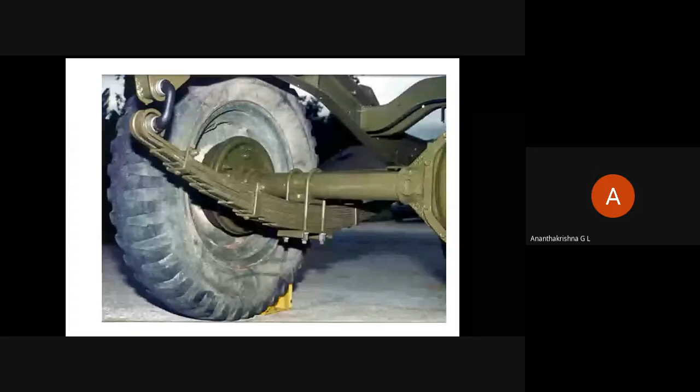Okay, so we were solving problems on leaf springs. I think we'll solve one more problem before we go to a combination of leaf and helical springs. Note down this problem.

A laminated leaf spring has an overall length of 1100 mm and has a central load of 160 kilonewton. This spring has 3 full length and 15 graduated leaves with a central band of 100 mm wide. All the leaves have to be stressed to 400 Newton per mm square when fully loaded. Ratio of total spring depth to width is to be approximately 2. Determine these parameters.

Okay, solve this problem. I'll give you maybe 7 minutes time. Solve the problem and get me the answer, all of you.

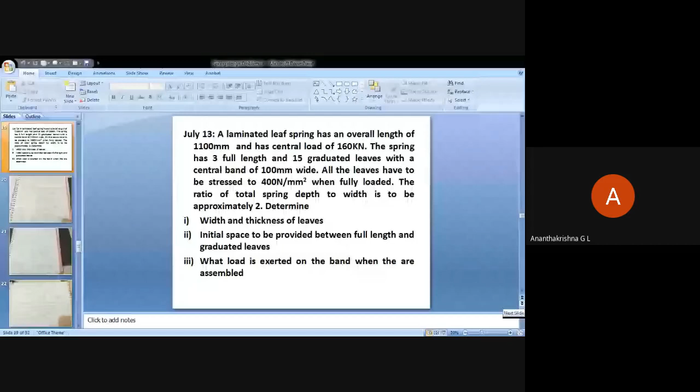It was asked in one of the examinations. So let's see.

Tirumani Shetty solving the problem. Yes, sir. Yeah. Beldar, are you there? Yes, sir. Solving, sir. Yeah, yeah.

Note down the data, equations, substitution, and then solution.

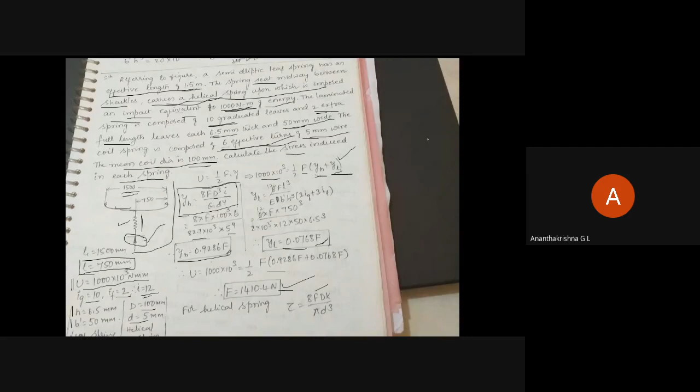Yes, sir. Yeah. Solve the problem and get the solution. Get me the value of stresses and also cross check your values with the answers that are there on the screen for you.

It is 12 FL cube over here. That is the effective length. G, you can assume it as 82.7 into 10 power 3 megapascal.

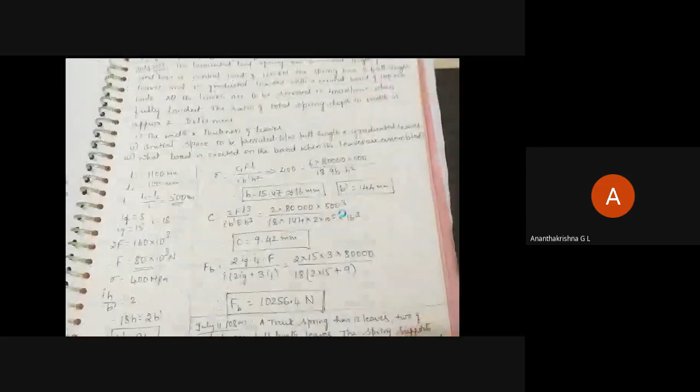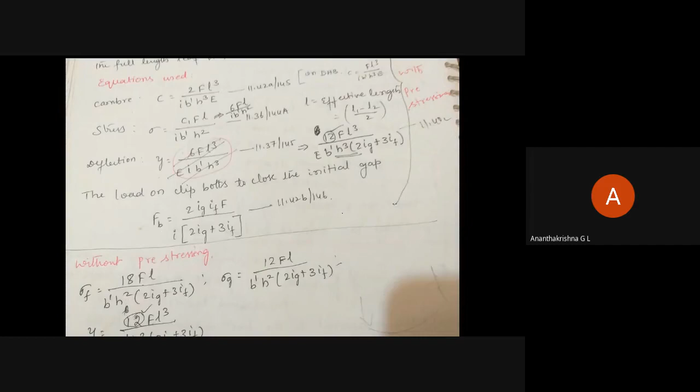Yeah, I missed out on that. There will be variation over here because I missed out on 2Ig plus 3IF. There will be slight variation.

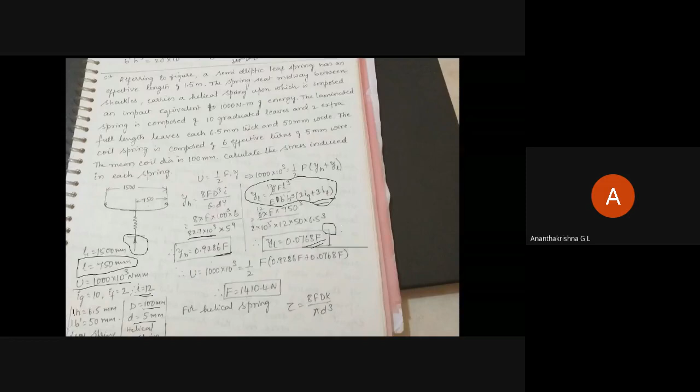This is point, how much? 0.07? 0.0709, okay. So for that, then F may change a bit, no? What is the value of F you get?

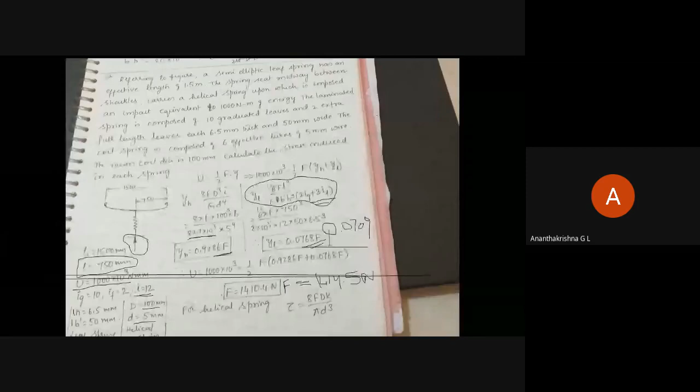So calculate stresses accordingly. K is 1.0702, that is the Wahl's correction factor.

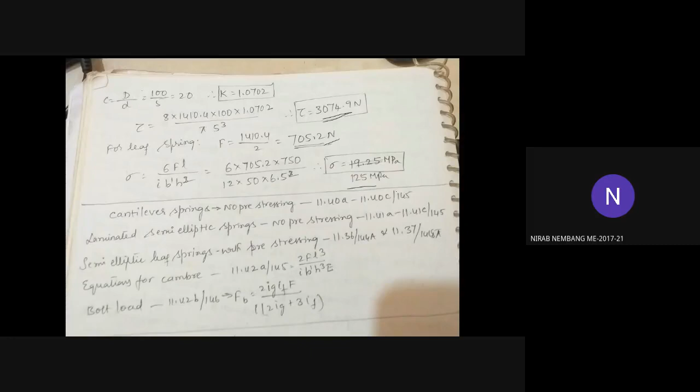What is the stress in leaf spring? How much you're getting? 3074.9. No, that is stress in helical spring. But what is the stress in leaf spring? The same only, sir, 125.54. 125.5, okay, fine. Shall we go to the next part of the thing?

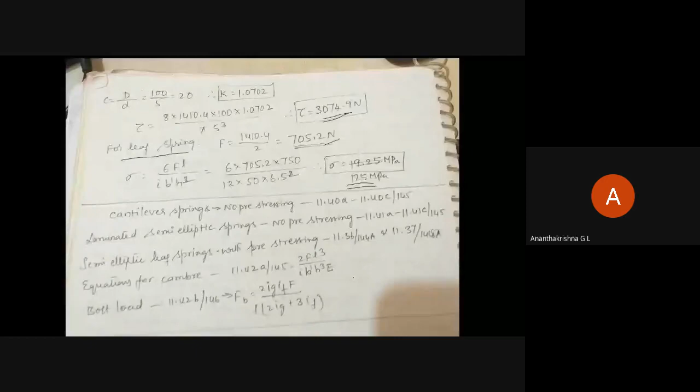Surging in springs. Are you all okay? Solve the problem. We'll go to the next part. Are you all there now? Yes, sir. Okay, yes sir. Stop writing and please observe.

This is one of the helical springs. There is another helical spring picture that I have taken. See, we are trying to understand what is surging in spring. Please note down surging, S-U-R-G-I-N-G. Surging in springs.

Okay, so please observe here. This is one of the helical springs. Normally in case of valve springs, they are subjected to variable loads and variable impact loads. So load is applied at this point. Because of this variable impact load, the first coil will deflect first, and then that deflection will be translated one by one like a waveform to the next coil and the next coil. Because of the repeated application of load, the wave will keep traveling and there's a reaction coming in the opposite direction. If the time of application of load becomes equal to the wave travel time, then resonance is going to occur in the springs, right?

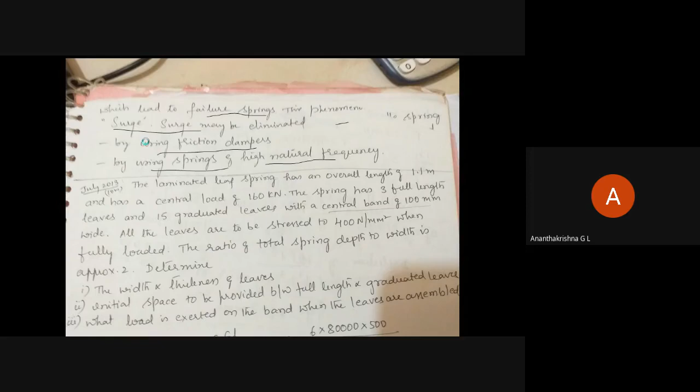You can avoid resonance, thereby you can avoid failure because of resonance. This phenomenon is called surging in springs.

A typical example is the valve spring of an engine, where a variable amplitude load is applied, and all the load is taken up by the first coil, because the deflection does not travel continuously. So one after the other, the wave is transferred to different coils of the spring, and then from the support there is reflection back of these loads.

If the time of application of load becomes equal to the traveling time of these waves, then resonance will occur, which will lead to failure of springs. This process is called surging, and therefore to avoid surging we can use friction dampers.

The dampers offer a resistance for the vibrations that are occurring. That is the function of a damper. It can be in the form of rubber pads or other aspects, or you can use a viscous fluid to absorb the vibrations.

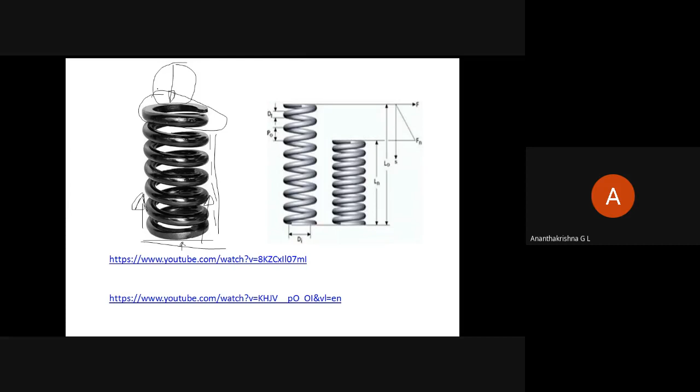We can eliminate surging with the application of friction dampers, and also we can build springs such that their natural frequency is different from the resonant frequency. This is what is called surging of springs.

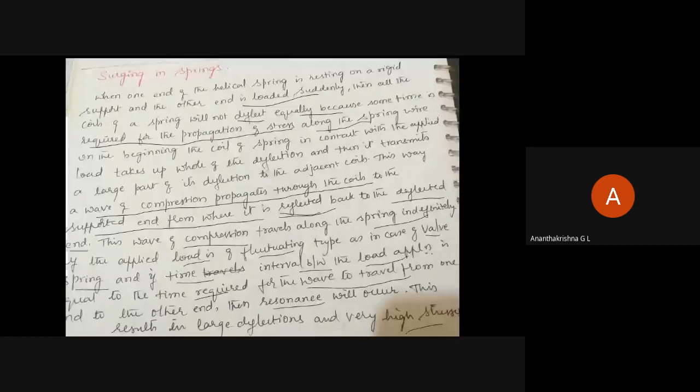Next, note down Belleville springs. With that, we will come to the end of leaf springs, and with surging of springs, we come to the end of the topic on leaf springs.

Next, note down Belleville springs. They are in general called washers. This is how it looks like.

A Belleville spring looks essentially like a coned disc spring, which is in the form of a cone. So when do they use such washers, Belleville washers?

When you have to have a spring in a very limited space and the application of load is more, where load absorption should be more in a limited space, then people use Belleville springs, or in general they are called washers.

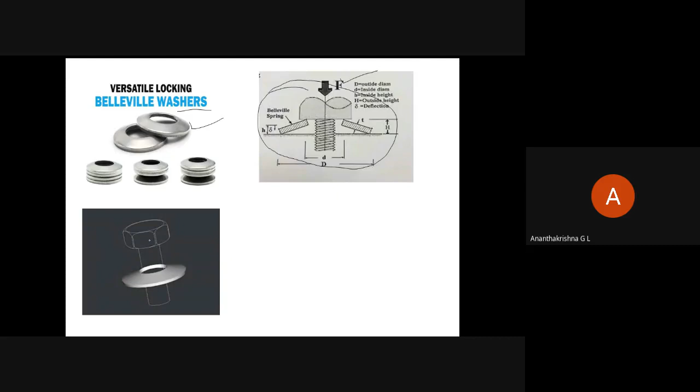So a cone disc or washer will be something like this. You will have an inner circle and an outer circle, and it will be bolted in this direction to absorb more and more energy or load.

Multiple washers or multiple Belleville springs can be used, and they can be arranged in series or in parallel. When arranged in parallel, it is used for increased load, whereas stacking in series will have increased deflection. Depending upon the type of application, we can have various configurations of Belleville washers or Belleville springs.

Compared to a coiled spring, a Belleville spring is much smaller and can bear much larger load relative to its deflection rate. This is the introduction needed for Belleville springs: it can take up much larger load in a limited space, and it can be stacked in parallel and in series.

When stacked in parallel like this, it can take up more and more load. When stacked in series, it will have more and more deflection. Note down these three sentences in your notebook. I'll give you 5 minutes time.

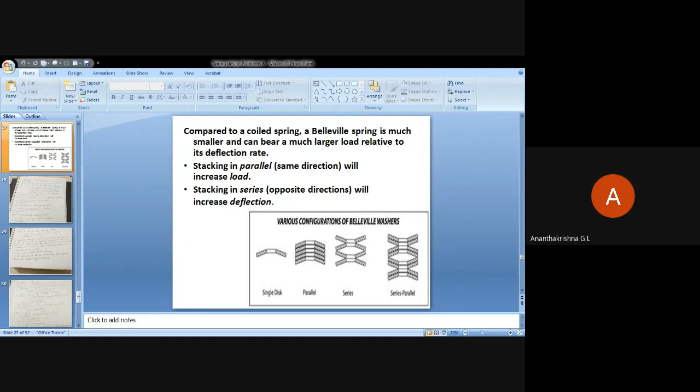Basically, what happens is the deflection will be transferred, and all of this happens in a fraction of a second. When the first coil deflects, there is some time lag till the deflection is transferred back to the last coil. Then this last coil starts vibrating and reflects the waves back, and thereby surging takes place.

So the entire spring is subjected to a sort of vibration. When the natural frequency of the spring becomes equal to the waveform, that is the vibration generated because of sudden application of load, then resonance will occur. That's the simplest explanation.

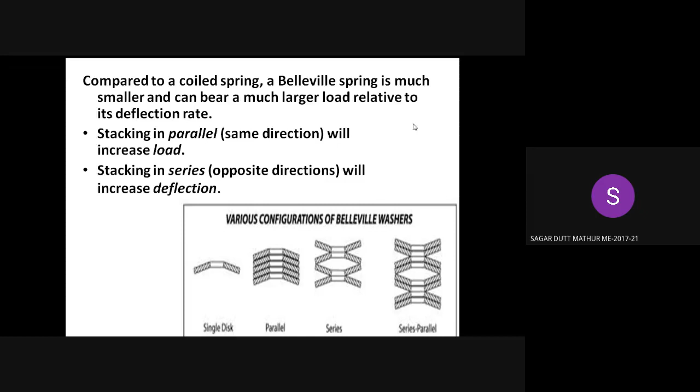Then, sir, which combination is better, parallel or series? It depends upon the type of application. If you have to take up more load, then you go for parallel arrangement. If the load taken is less, but you can allow it for more deflection, then you go for series application. It all depends upon designer's choice and the type of application.

Okay, fine sir. But normally in my 10-12 years of practical experience, I have not seen such stacking of washers. Normally they use one washer, and they may use sometimes this lock nut type washer, which is open at both ends and which will have a little lifting. Such type of locking washers they use for taking up more and more load.

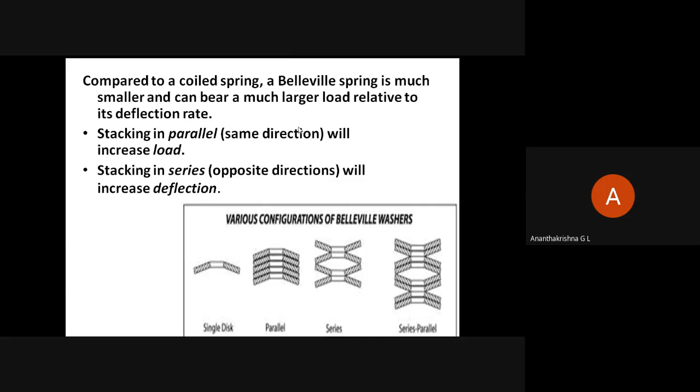Now please note down the sketch of the washer. This is height of dish, DI, DO. This is the thickness of the plate T that is used for making the washer, to manufacture the Belleville spring. So thickness of sheet used is T. DI is inside diameter of the spring. DO is outside diameter of the spring. T is the thickness of plate. H is free height of spring, and F is going to be axial force.

Y is called deflection. Nu is Poisson's ratio, and E is Young's modulus. Note down the sketch and note down the descriptions: DI, DO, T, H, axial force, axial deflection, Poisson's ratio, and Young's modulus.

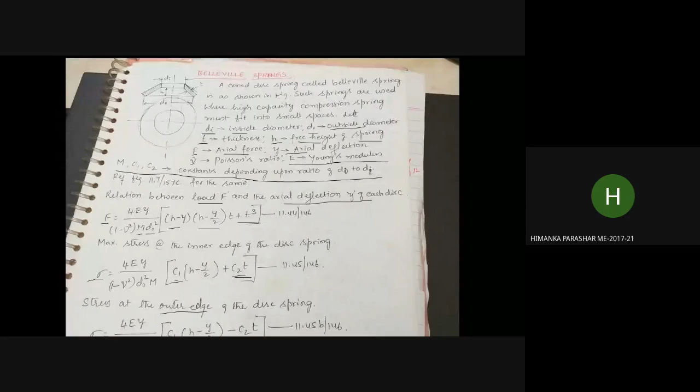Sir, the last equation is not clear, sir. Can you move the screen a bit down, sir? Moving the screen, let me check. Can you see the screen now? Yes sir, yes sir. Is it visible now? Yes sir, yeah.

Noted down all the equations. Okay, now do you have data handbooks with you? Yes sir. Just open and go to figure 11.7. Maybe figure 11.7 may be slightly different. You can use that figure to find out the values of M, C1 and C2 depending upon the ratio of DO to DI. Those who have the data handbook, please open and check if there is a figure, and let me know the figure number for the benefit of others. These equations are available in the data handbook. Maybe the chapter number is same, but these equation numbers may be slightly different, so please check if there is any variation.

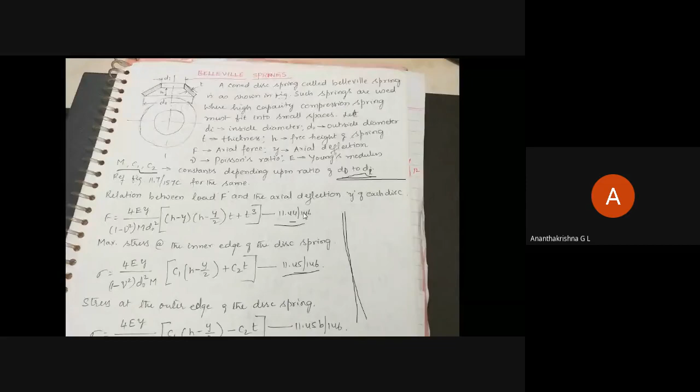Have you opened the data handbook? Anybody? Okay, anyway, have you noted down all the equations, all others? Anybody needing time? Gunasagar, Rasik Baran, yes sir, noted sir. Noted down all the equations? Yes sir, all the three. Okay okay, then what we'll do, okay so 37 of them are there, okay so...

Ankesh Aman, are you able to understand what is Belleville Springs? Yes sir. Okay, Basuraj, Outiger, Gautam, Sai? Yes. Okay fine. So now Niharika, are you okay with Belleville Springs? Yes sir. Okay fine, then we'll close it for today.

Saturday we'll solve problems on Belleville Springs. Please now go through those equations and then we'll solve problems on Belleville Springs. Is that okay? Fine? Yes sir.